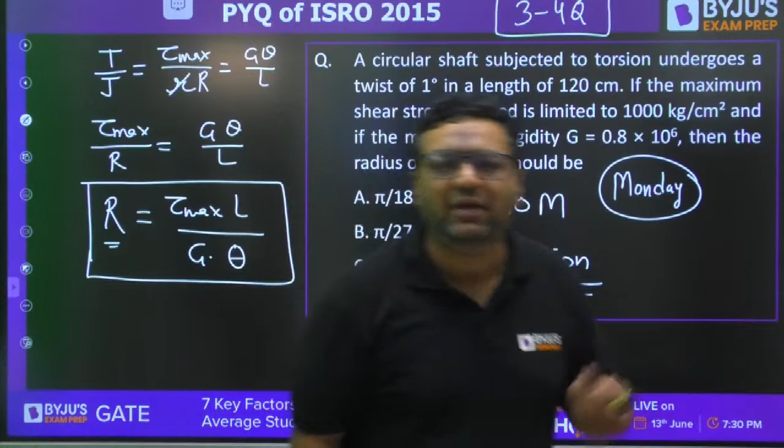Hardly 3 to 4 questions in the paper are time-taking, so in the real exam attempt those last since time is limited. GPA, please solve these questions. When you see all types of questions today, you'll get an idea of the different things they ask in the paper. Previous years' papers help because many times questions repeat in ISRO too. Today I'll show you 4 repeated questions which we've already discussed in the ISRO PYQs.

Ruto has given the right answer, 27 by pi is correct. First you need to convert theta. Theta is given as 1 degree, you can write it as pi by 180, and this becomes radian. Whenever you put the theta value into sine, cos, or tangent, you need to put it in radians only. So when you put this value, the answer comes out to be 27 by pi. So D is the right answer.

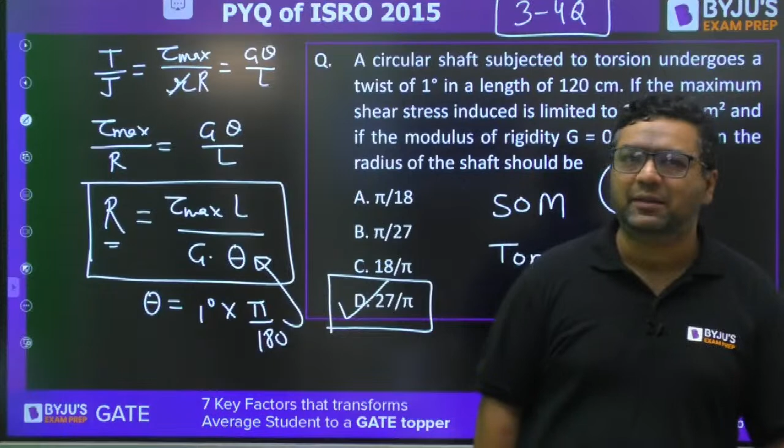Vinod, I feel you have made some mistake here, the answer is D. I have already solved it for you, let me cross-check once again. I had already done it before starting so I can tell you the right answers. Yes, the answer is D, no doubt D is the right answer. I've also matched it with the official answer key, answer is D for this. Is it clear? Shall we move on, guys?

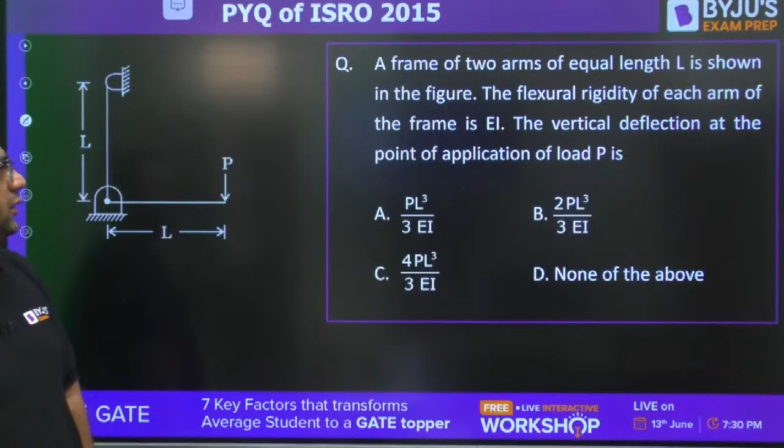Shall we move on, guys, to the next question? It's once again from strength of materials, related to deflection, and it's a very easy question. In fact, it's a repeated question from GATE, asked in GATE mechanical, civil, XE, all the branches.

In this question, they say a frame of 2 arms of equal length is shown in the figure. The flexural rigidity of each arm of the frame is EI. The vertical deflection at the point of application of the load is what we need to find, deflection at A. If this is A, this is B, and this is C, to find the deflection at A, you just need to partially differentiate the total strain energy with respect to P. That gives you the deflection at point A, in the direction of load. This is what you need to do.

Very good, Jamin, Roshan. Are you giving the answer for this question or the previous one? When you do this, U is nothing but the strain energy of AB plus BC. Great, Jamin. So if you see the AB part, you are going to have this shear force.

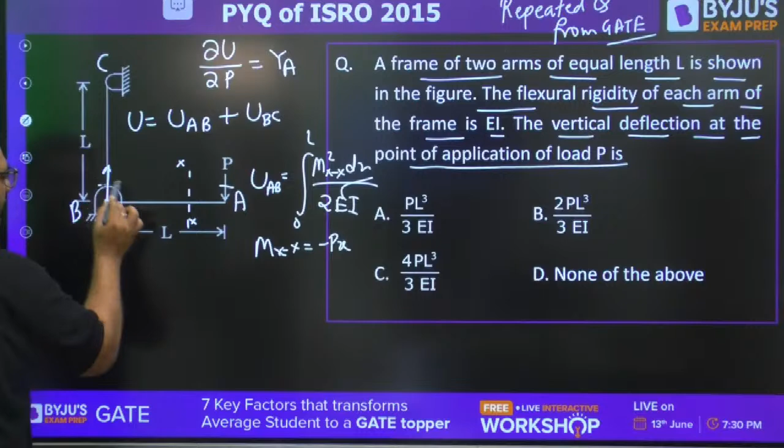When you take the section XX, you can write U of AB equals the integration from 0 to L of mxx squared dx upon 2EI, where mxx is nothing but minus px. Similarly, for BC, you make one force here, another force there, and this makes a couple. So for this beam we have a bending moment and axial force, and we find energy only due to moments. So U of BC comes out to be once again mxx squared dx upon 2EI, integration from 0 to L.

So when you add their U together... and Pagel word, yes Pagel word, you're slightly late today. So the answer for this, everybody is saying C. They are asking for the deflection, and yes, everybody has got C.

There are some questions which are coming as it is. Okay, fine guys. Shall we move further? Are we ready?

So for this question, are we getting B or C? Please tell me, look at it carefully and then answer. B or C? When you will be finding out the strain energy of this, what will you be getting?

Px squared, so you will be having P square L cube upon 6EI. That's the energy you get. And when you will be solving this, you know this is going to be the case, and you put the value as it is, P into L, so we will be having P square L cube upon 2EI. So when you add these two, P square L cube, you can write 3 here, 3 into 3, so 3 plus 1 is 4. It will be 4 P square L cube upon 6EI.

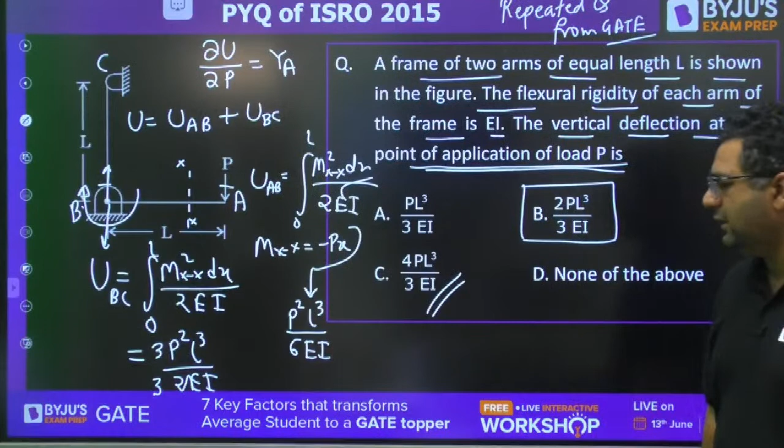Moving to the next question from thin cylinders, once again strength of materials. This is asking: a thin cylindrical shell of diameter D, length L and thickness T is subjected to an internal pressure. The ratio of the longitudinal strain to the hoop strain. So you know we are having longitudinal by hoop. Okay, longitudinal is PD by 4TE.

What will you be getting, 2 minus mu or 1 minus 2 mu? Is it correct or have I written it opposite? Okay, Roshan has given the answer to be B, Pajalward has given the answer to be B. Have I written it correct or wrong?

Is it correct? When you are going to find out the circumferential strain, you write sigma C by E minus mu times sigma longitudinal by E. So we are going to have sigma, this will be, I feel, sigma C is PD by 2TE minus mu times PD by 4TE. So when you have this, PD by 4TE, it is going to be 2 minus mu.

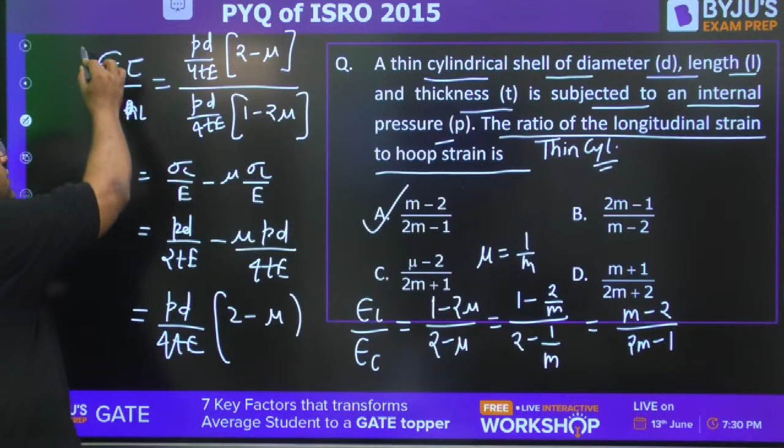Are you getting it? This is the ratio of circumferential to longitudinal, but we need to answer longitudinal to circumferential. And you know Poisson's ratio is mu, so you can write mu equals 1 upon m.

Did you get your mistake or not, please tell me that. Everybody, yes, so the answer for this is going to be A, not B. Is it clear for everyone?

Shall we move on, guys? Don't worry dear, here we are only to correct ourselves. We can make mistakes here, but we need not make mistakes in the exam. Is it clear for everyone?

Now this question is also a repeated question, already asked in GATE and ESE both. This is a repeated question of both GATE and ESE. Yes, only one change they have done: they have increased the length to 2L. In the original question, length was L.

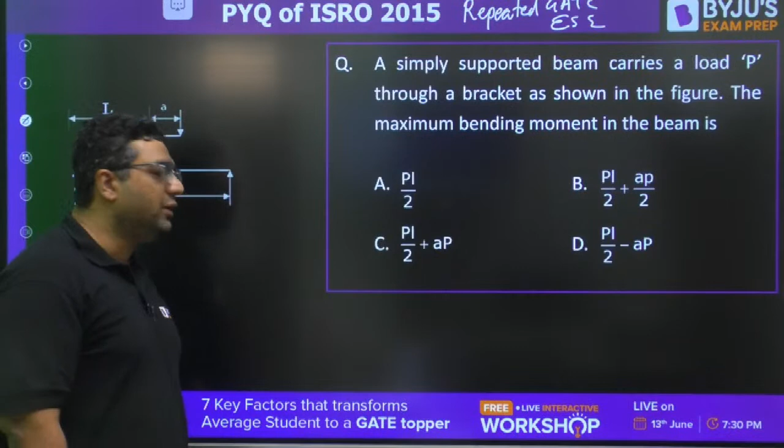So do not copy and paste this time, Jamin. Jamin, did you get the mistake or not, please tell me that, regarding the previous question. Please answer guys, how will I get to know if you are getting it or not? Very good, so this is the case: we are going to have a simply supported beam, with supports A and B.

So here the reaction RA will be coming, here the reaction RB will be coming. We also have the force here. First, we will shift the effect of the force onto the beam. We apply one force downward, one upward. This and this will make a couple like this. So now we have a simply supported beam like this. This is RA support reaction, this is RB support reaction. At the center we have a force P, and then we have a moment P into A.

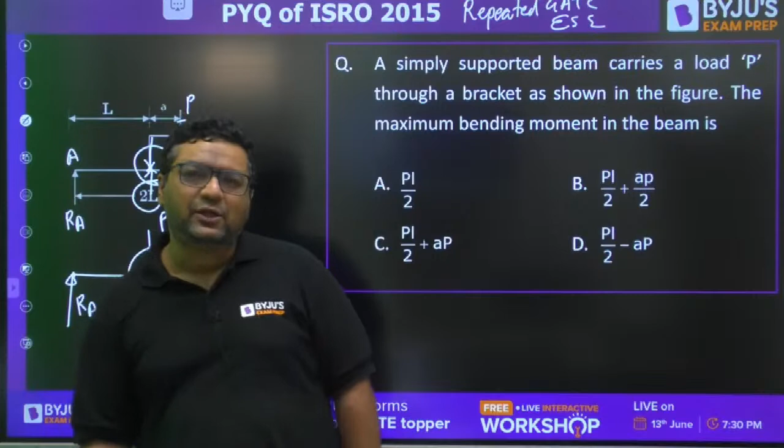You need to tell the maximum bending moment. Why is it in terms of M, why not in terms of Poisson ratio? Actually, Poisson ratio is also defined as 1 upon M. Whenever someone defines something, he defines it in his own way. There were researchers living in countries where the FPS system was used, some used the MKS system, some used the SI system. So based on their system, they define things accordingly. Their notations are like in material science where you study alpha, beta, gamma - these are Greek words. So it depends on who gave the definition. Poisson ratio is always defined by either mu or 1 upon M.

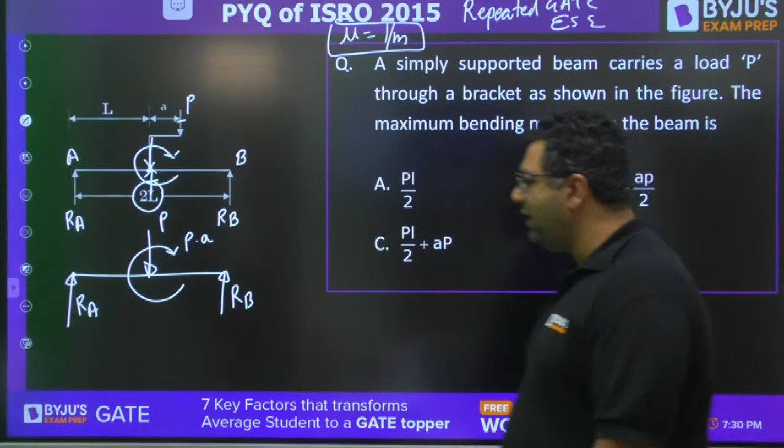So the answer for this is okay - answer given by Pagel and Roshan is B. We will check that. First we will find out RA and RB. RA will come out - total length is 2L, mind it, total length is 2L. You will have P by 2, then minus PA by 2L. This is RA. What is RB? P by 2 plus PA by 2L.

When you go for the bending moment diagram of this, it is very easy, we have seen this many times. It will go like this, then there is a jump due to this, and then it is like this. So this value will be the maximum bending moment. If you want to find this value, you can do RA into L - that will give this value - plus you need to add PA. So maximum bending moment will be RA into L plus AP.

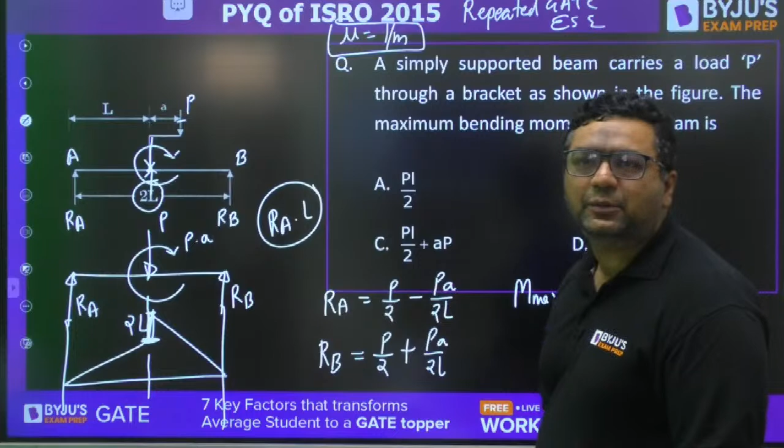So RA is P by 2 minus PA by 2L into L plus AP. When you solve this, you get PL by 2 minus PA by 2 plus PA. So it is PL by 2 plus PA by 2. Is it clear? Yes. So are we getting the answer?

What is the answer for this one? Is it C? This is PA by 2L, multiply with 1 by 2. Where do I need to multiply with 1 by 2? Dear, this is the load P, divided equally into 2 - P by 2, P by 2. Then this is P into A, so PA by 2L will be subtracted here, added here.

Why? Because the direction of this is going to be like this, same as that of RA. So here it will be subtracting, here it will be addition. Then I have multiplied it with L, because this half length is going to be L. So when you multiply with L, you get PL by 2 minus PA by 2L, and you get PL by 2 minus PA by 2 because L and L get cancelled out. Then you have plus AP. So the answer is going to be B.

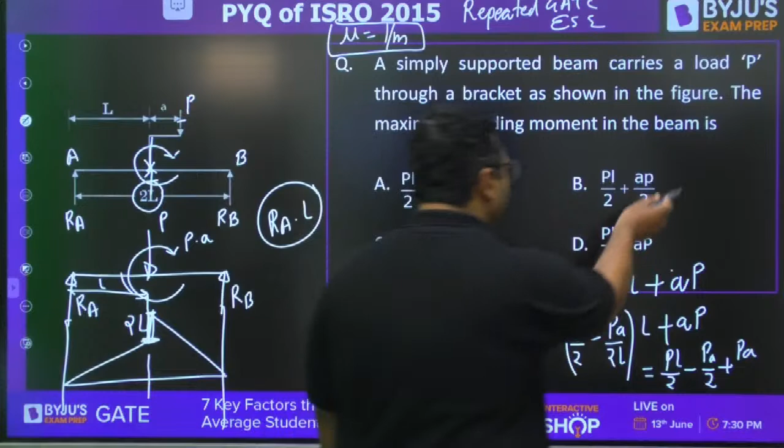Jamin says what you said I didn't get, but the multiply with 1 by 2 I didn't get. I feel the answer will be B for this - PL by 2 plus AP by 2. Is it clear for everyone? Please tell me. Okay, very good.

Moving to the next question, guys. Now we are coming up with the column chapter. This question is from column. This time I will not help you, I need the answer from your end. It is an easy question. Very good Karan, very good Roshan, very good Pagel word. So, answer for this question.

A vertical column has two moments of inertia, Ixx, Iyy. The column will tend to buckle in the direction of: option A, axial load; option B, perpendicular to the axis of load; option C, maximum moment of inertia; option D, minimum moment of inertia. Very good Arunita, Pejal Word, Shahid.

Naruto, Vinod, Jamin - the answer is D, because you define Euler's buckling load as pi square EI minimum upon LE square. So my dear, buckling will always happen for minimum I, because where I is minimum, buckling will happen since the load will be lesser there. So D is the right answer.

So guys, next is machine design theory of failure. Machine design theory of failure. Tell me this answer, this is question number 7 going on.

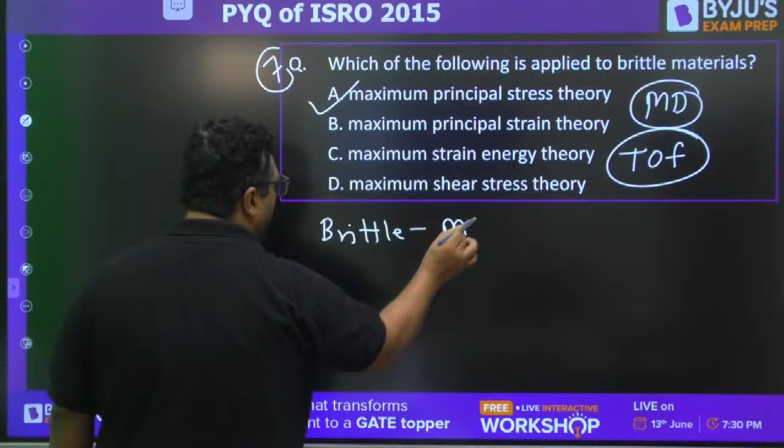Very good. MPST. Here I am telling you, if they say material is brittle, you need to decide without any thinking - you will say MPST. When they say ductile, then you know there are two options. If nothing is mentioned, MSST. If they say ductile material and we need the economical theory, then economical is MDET. But that is a rare combination, never been asked. So either this or this has been asked.

Moving further, wonderful guys. This is once again a repeated question of gate mechanical. That's why I said when you are going for mechanical engineering questions for gate, or questions of ESE, many questions will be repeated. I feel everybody got this question. This is a repeated and very famous question.

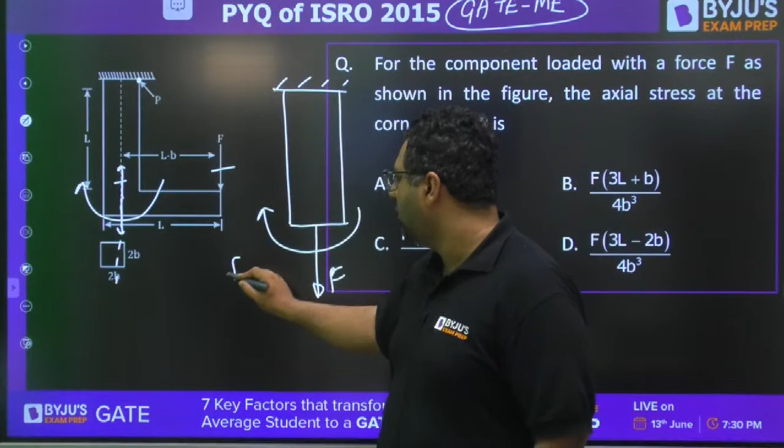So this is from bending. They have applied a load F here and they are asking the stress at this point P. For that I need to shift this load onto the longitudinal axis of this member. So we will be applying one force downward, other force upward. This and this will be creating a moment like this. So finally we are having a member now like this, and we have two things: one is M, other is F actually. F into L minus B - this is the moment. And you need to find out the stress at this point. Okay, this is the question.

I feel here also many students have remembered. Yes, try to solve it guys, because in paper they will change something and you will be thinking what happened. First of all, it is a square geometry of 2B side. So you know that at this point P, this load will give us tensile stress only like this, and for bending you can see it is like this.

So we just need to add these two values. So if you want to write down the stress at point P, you will write force by area plus M upon Z of NA. You know force is F, area is 2B whole square. Then bending moment is F into L minus B - very good, Jamin, F into L minus B. And Z is A cube by 6, so 2B cube by 6.

When you will be solving this, answer will be coming out to be D. Here you have F by 4B square plus F into L minus B divided by 2 cube is 8 - it is 6, 8 B cube, so it is 4, it is 3. Okay, so we can write in the denominator 4B cube. You would be having here F into B plus F into 3L minus 3B.

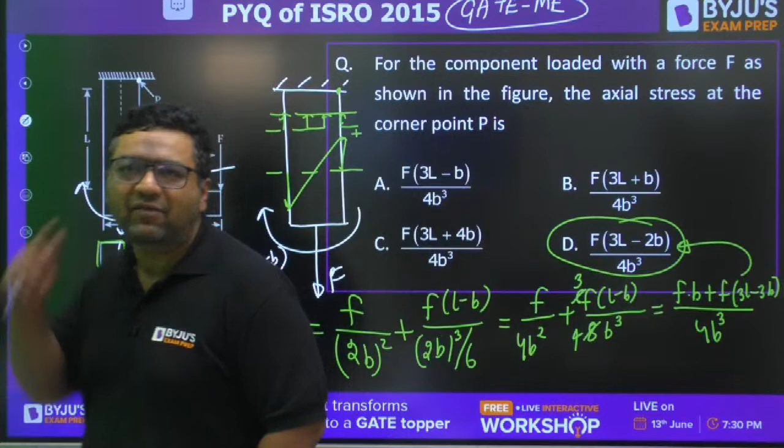So solving you will get option D. Jamin has given the right answer for this question, Shahid also, Naruto also, but I feel Vinod and Pejal have made the mistake. Got it? Got it, Pejal and Vinod? Please tell me that.

Wonderful guys, moving to the next question. Next is once again from SFD BMD - actually it is from SFD BMD plus bending, because they are asking you the bending stresses, the maximum magnitude of bending stress. We know that when we are talking about maximum bending, it will be M upon Z of NA. So when it is maximum, M should be maximum. So using SFD BMD, you need to find out the maximum bending moment. If you get the maximum bending moment for this, you will get the answer.

And for that you need to write the bending moment equation. For that you need to find out support reaction - first find out RA and RC. Then after finding this out, you can go for the shear force equation, bending moment equation, where shear force becomes zero, bending moment will be maximum. So that is how you need to go about it. If you are going with equations, or with the BMD diagram, you must be aware that from the BC region, you would be having a parabola. I will be showing you the diagram as well, but first you find out the value of RA and RB - this is the first task.

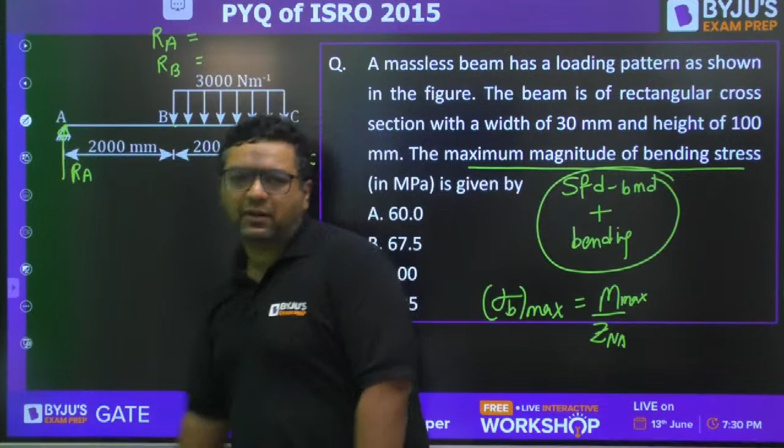So you can see in this paper, some questions are lengthy, like the 2020 paper. So in some of the questions you will find something like that, but otherwise all questions are theoretical. Yes, solve it guys.

Solve it, guys. Solve it, solve it, solve it.

After me, Suraj sir and Chandra sir will come for thermal, heat transfer, fluid mechanics, RAC, IC engine, power plant, industrial engineering, engineering mechanics, theory of machines. All questions would be covered.

In this paper, major weightage was for SOM, MD, and production. For these three topics, I have more than 35 questions. So that is how you can relate. In some papers the weightage is different, in others it is different.

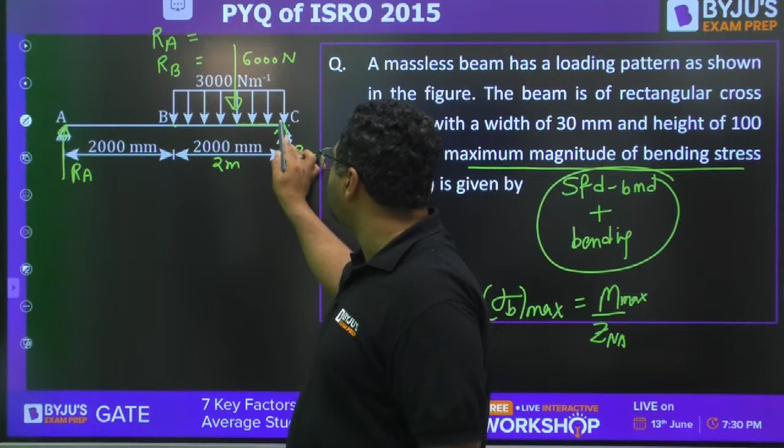So you can see this is 3000 Newton per meter applicable for 2 meters, and you can assume that to be present at the centroid. So at centroid, you can assume 6000 Newton, at 1 meter distance from here and 3 meter distance from here. From that only we will get the values. This will be 4500, this will be 1500. So values will be coming like that, and we got them very easily.

Now if you want to write the shear force equation, I am taking the section here at a distance of x. You can write it as per the sign convention: to the left upward, right downward is positive; left downward, right upward is negative. So right upward is negative.

So I will write minus RC plus W into X. It will be minus 4500 plus load 3000 into X. From here you get X equals 1.5 meters. It means the maximum bending moment will be coming somewhere here, at 1.5 meters.

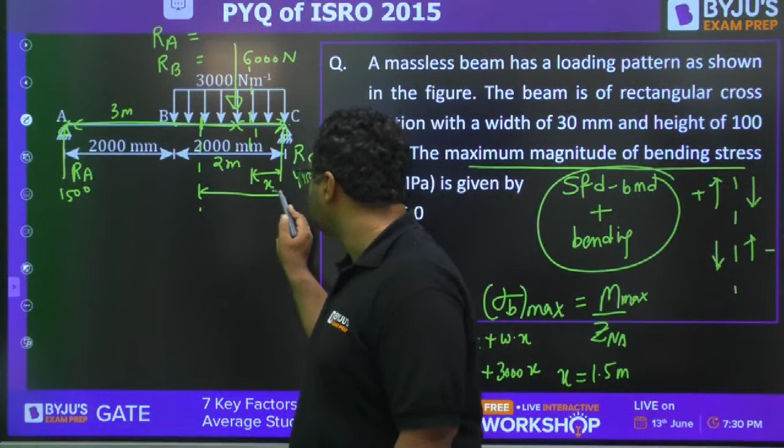Now my dear, if you want to know - very good, very good. Jamin have given the answer, Pejal would have given the answer, and the answer is correct as well.

So when we are talking about the maximum bending moment equation, you know the sign convention - this is sagging, this is hogging. This is creating sagging, so we will write RC into 1.5 sagging, minus W into 1.5 into 1.5 by 2. So RC value is 4500. 4500 into 1.5, minus 3000 into 1.5 squared by 2. Here you get the maximum value of bending moment.

So once you get this, you need to put it there, and they have already mentioned the width to be B, height to be 100. So Z will be BD square by 6. After solving, the answer comes out to be 67.5.

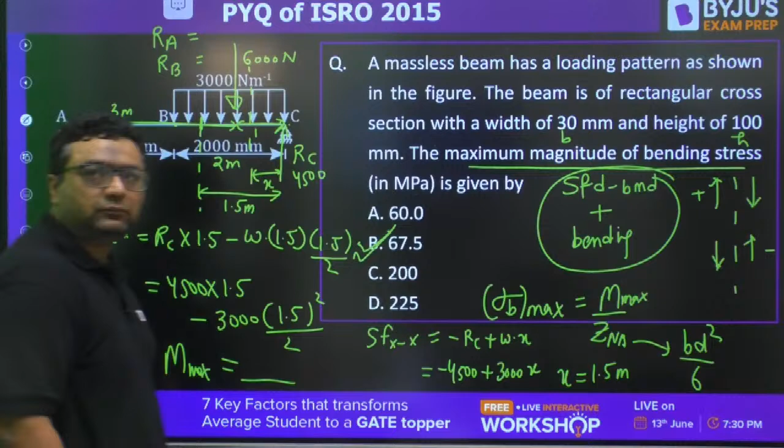Everybody understood? Please tell me that. This type of question you can have in GATE as well. So Jamin and Pejal have solved it. Vinod, you got it. Shahid, you got it. Naruto, you got it. Please tell me that. Everybody, please tell me that. Then only I will move further. This was question number 9 for us.

Yes, Shahid, this is very - that's why I said in ISRO paper you need to attempt these questions last, because if you solve these questions in the starting, you may not be able to complete the paper and you may leave some easy questions.

So that's why I always say when you are giving ISRO, in the first reading, you tick only those questions which you already know by looking at the question. The second attempt should be for questions using less calculation but which you know how to do. The third attempt should be for this type of question - third attempt meaning the third time you read the paper. So this is PL cube by 3EI, the deflection under the load P for a cantilever beam.

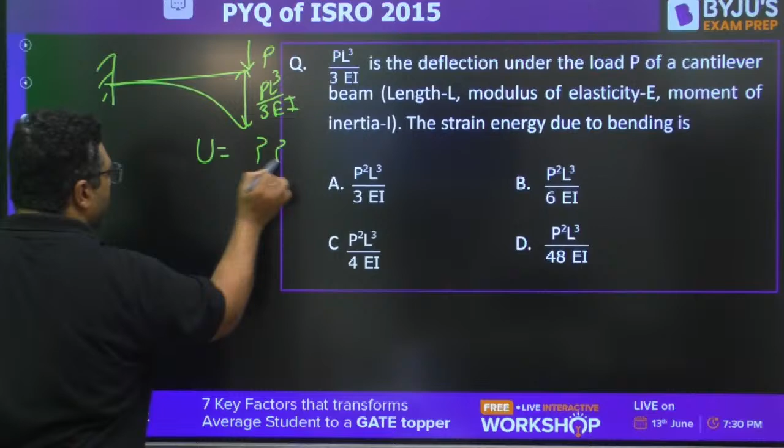The strain energy due to bending is - he is saying that if we have a load P like this, because of this you know the deflection is PL cube upon 3EI. Then what is strain energy? I already told you strain energy is half into force into deflection. You already know half, you already know P, you already know deflection. Just apply the formula and get the answer.

What would be the right answer? Wonderful, everyone have already given the right answer B - P square L cube upon 6EI.

Moving further, now material science questions came into picture. There is one good thing about ISRO - they put questions in continuity, like all SOM questions are kept together. Now you are having the material science questions, and material science weightage is equal to the weightage of production.

Sir, as per notification, single mark questions will be there. Dear, it doesn't matter about single marks, it matters about the time. Previously they were giving us 80 questions with a time of 90 minutes. Now you are getting 95 questions and a time of 120 minutes.

By looking at that, understand - don't go by weightage. Previously they were multiplying it with 3, now they are multiplying it with 1 only. That's the difference - they're just trying to make it complete 100, nothing more. But they will give you questions as per the time, not as per the marks. Are you getting it?

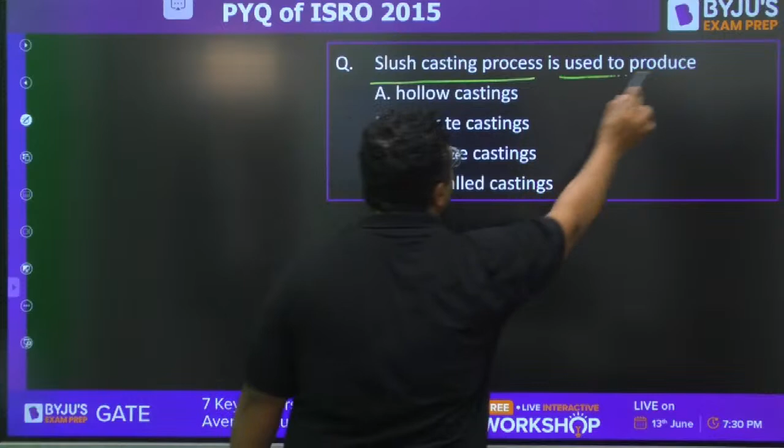Moving to the next: slush casting process is used to produce hollow casting, intricate, large size, or thin walled castings. Karan is saying B, Pejal said A, Neeraj C, Jamin A. The answer is A.

Whenever we are talking about slush casting, what do you do? You make a cavity like this. In this cavity, molten metal is kept, then it is allowed for partial solidification. When desired thickness is obtained - not necessarily thin thickness, just desired thickness - the rest of the molten metal is taken out. So whatever you got, that casting is hollow. It may be thin or thick, but it will be hollow. So the answer could be either D or A, but the right answer is A because it can be of thick wall also. So in this, what we are doing is partial solidification. Very good, Vinod.

Moving to the next question, guys. This is once again a question of gate type, from casting, on riser design, using Chvorinov's law. Solidification time is directly proportional to V by SA, whole squared. So you need to find out the solidification time ratio for sphere to cube.

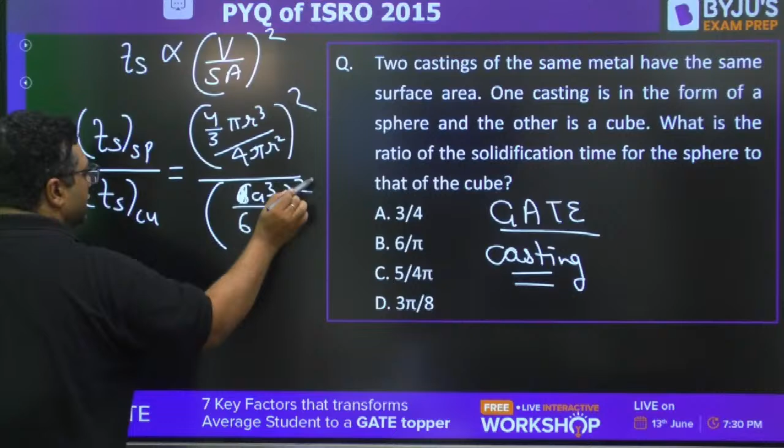Sphere to cube: we can write volume of sphere as 4 by 3 pi r cube, surface area as 4 pi r square. For cube it is a cube by 6a square. You need to find out this ratio with the given conditions. The hint is in front of you.

Calculate it, guys. This type of question you will be attempting in the last because they need more calculations. Solve it. From my side, this is question number 19.

Jamin is saying B, and B is the right answer. Very good, Jamin. What about you, Vinod and Pejal? Shahid, Karan, are you doing or not? Yes, everybody. Pejal, the answer is B. It is very calculative - 6 by pi is the correct answer.

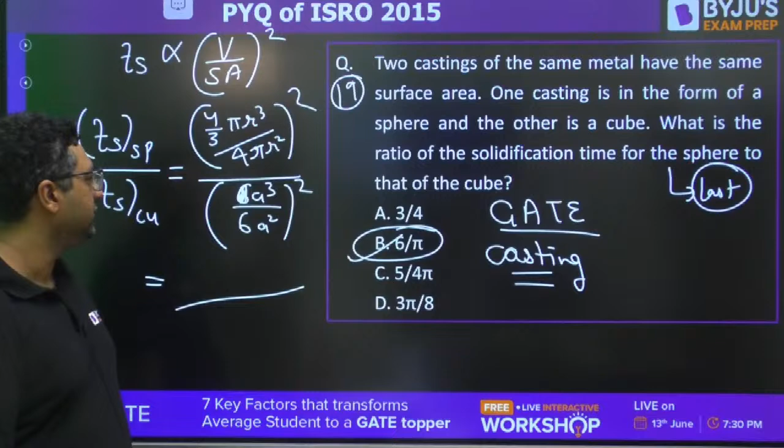Moving further, guys, you'll see this 4 will get cancelled out, pi will get cancelled out. This is 4 pi r square, this is 4 by 3 pi r cube. So when you solve, the answer will be coming like this. They have the same surface area - already given the same surface area - so you can directly cancel out these two things, and you will be getting the answer to be 6 by pi.

Metrology and inspection.

We are using plug gauges for: taper bores, cylindrical bores, spherical holes, or none of the above. You must be aware that plug gauges are used for holes, and ring gauges are used for shafts.

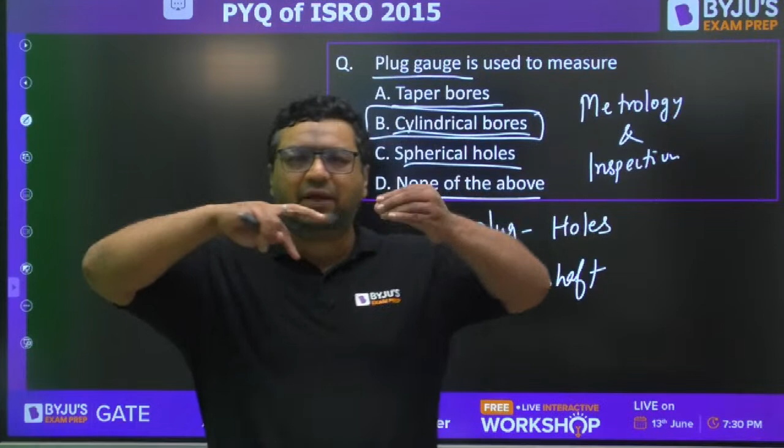There's confusion between A and C, but both are wrong, Fejal. The answer is B for this. When you have ring or plug gauges, ring is like this - this is a ring, so ring is used for cylindrical. We always study only for cylindrical bores, meaning cylindrical holes only. So C - we have never studied about spherical. You must be confusing between A and B, but taper we do not study, so we go for cylindrical bores.

This is question number 21.

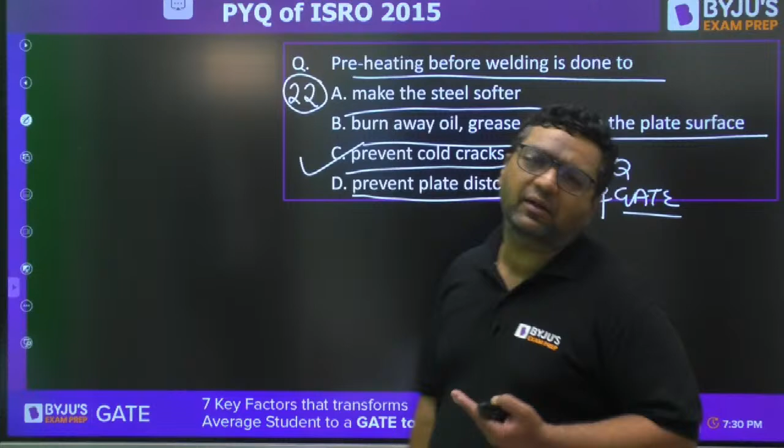When we go with preheating, this is our target, because the cooling rate of the nearby area will reduce. Because of that we will not have cold cracks, so when we are not having cold cracks, this is the purpose. But we also get these other advantages, because whenever we go for preheating, oil, grease, and those layers are also burnt out. So this is also correct, but the purpose is preventing cold cracks - these are extra benefits we are getting.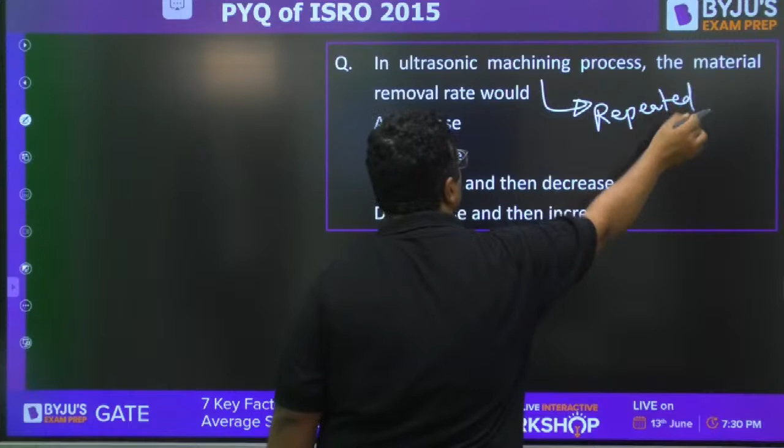This is a repeated question on ultrasonic machining. The material removal rate would increase, decrease, increase then decrease, or decrease then increase - what would be the answer? This is question number 25.

Vinod is saying C, Jamin and Naruto saying A. This time Vinod is correct. First it increases, then decreases. So when we are talking about ultrasonic machining, the material removal rate first increases, then decreases.

Why? Because when we go for ultrasonic machining, we produce vibrations. We are applying abrasive particles which act like cutting edges. So when the tool moves inside for machining, other cutting edges will also apply mutual drag between them, so they are less induced in cutting. That is why initially MRR is more, then we get less MRR. The reason is the mutual drag present between the cutting edges. Got it everyone? I've given the explanation as well.

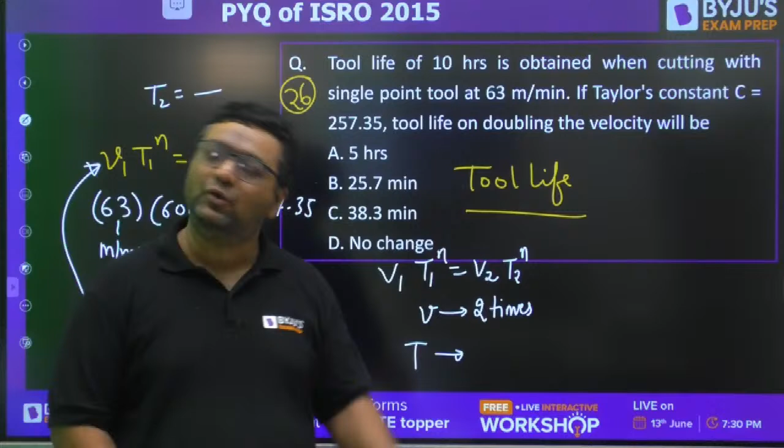No one can solve these type of questions without a calculator, since you need logarithm here. Without a calculator, you cannot solve it - you need at least a log table, otherwise it's not possible.

Moving to question number 27. This question is from the 3-2-1 method, jigs and fixtures. This type of question was also asked in GATE 23, in a more difficult format - based on the 3-2-1 method, the 3-2-1 principle.

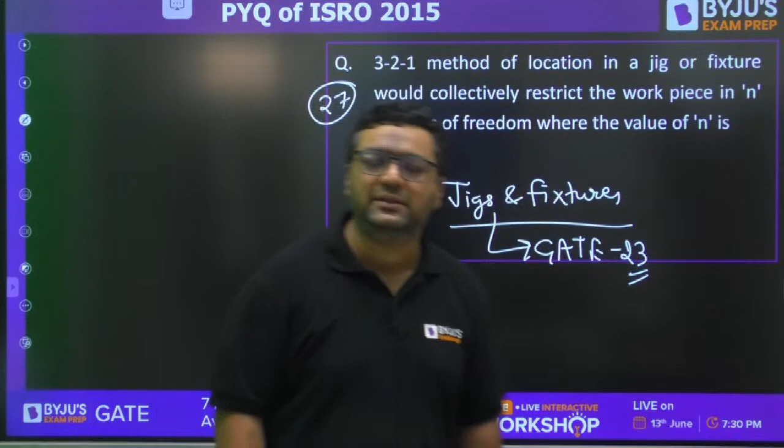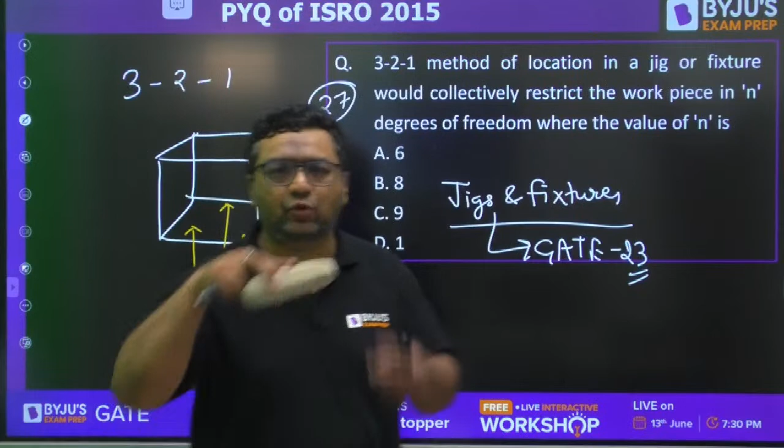Jamin is saying 9, Vinod is saying 6. Whenever we are using the 3-2-1 method, we are having a body like this. We provide 3 pins here - 1st pin here, 2nd pin here, and 3rd pin here. So assume this to be the body, and I am applying one pin here, another pin here, and a third pin here.

By providing these 3 pins, I am restricting this rotation - it cannot go in the negative x direction. Similarly, we apply 1 pin here, another pin here, which stops this 3rd rotation and also restricts this translation. We apply 1 more pin here as well. So these 3 pins restrict rotation clockwise, anticlockwise, and also restrict translation - 5 degrees of freedom are restricted by these 3 pins.

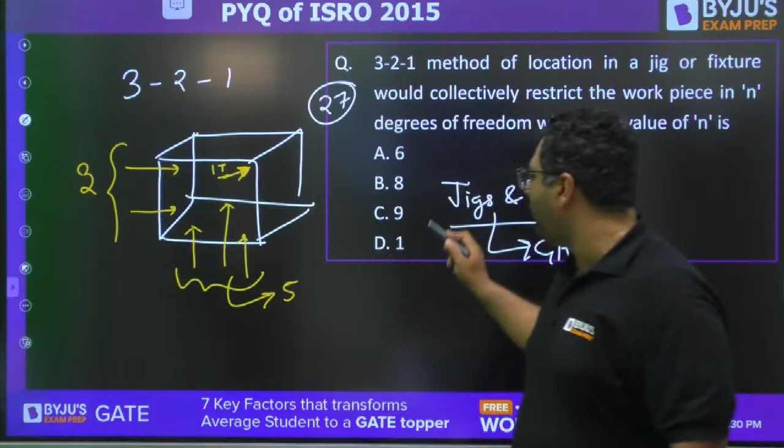Similarly, when applying these 2 pins, you restrict rotation in this and this direction, because one pin is here and the other is here - it will not allow it to rotate like this. So 2 rotations and 1 translation, meaning 3 degrees of freedom are restricted by this. 5 plus 3 equals 8. When you apply this last pin, it stops motion in the Z direction - only 1 translation. So total 9 degrees of freedom are restricted by 3 plus 2 plus 1 pins.

So the answer is 9 for this, guys. Please tell me, did everybody get it or not? Neeraj? Very good. Karan, Vinod, got it or not?

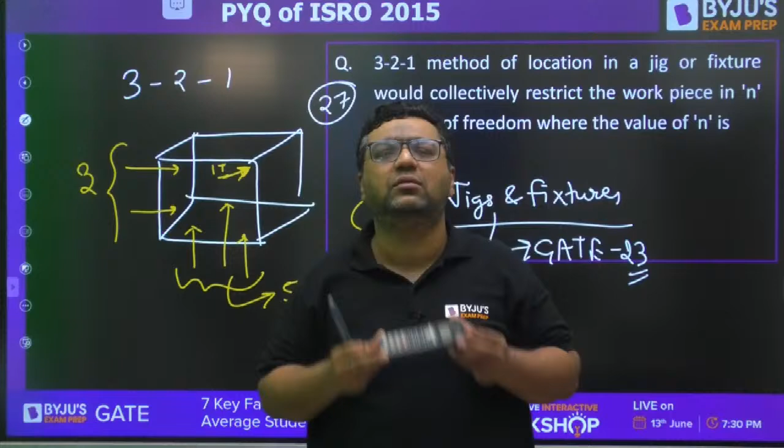Still have doubt? Just feel it. This is the body - if you have one pin here and another pin here, it will not allow this to rotate, clockwise and anticlockwise. Total degrees of freedom are 12 - 6 translation, 6 rotation. One rotation clockwise about the x-axis, other anticlockwise about the x-axis - so these 2 are restricted, these 2 are restricted, meaning 4 rotations and 1 translation, so 5 are restricted. When we talk about this and this, it will not allow this rotation and this translation. So total, my dear, 9 degrees of freedom are restricted by these 6 pins.

Okay, so 6 pins, 9 degrees of freedom.

Moving to the next question, related to metal cutting. Question number 28, it is a slightly lengthy question.

They have given the rake angle alpha as 5 degrees, the undeformed chip thickness (uncut chip thickness) as 0.25, the width of cut, the shear strength as 350, and the coefficient of friction. You need to find out FC and FT.

FC and FT - I feel you would be aware of the shear force. First you need to find out shear force, and from that you can find out FC and FT. Everybody should remember the formulas for this. Try this and get it. This is question number 28.

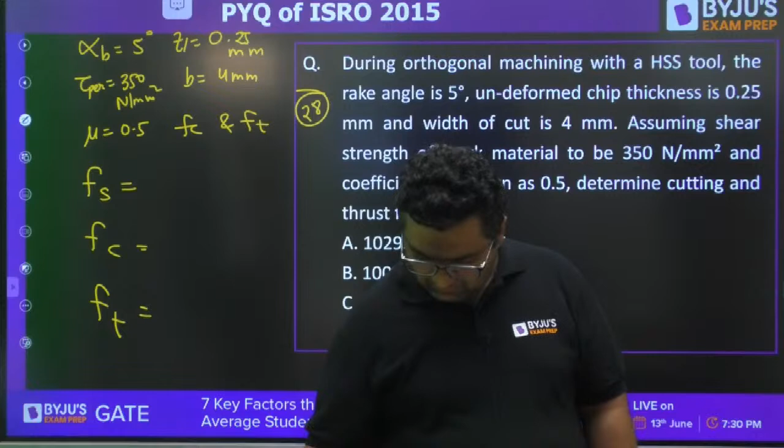After that we are left with 7 more questions from my side. Only this was the last numerical from my side; all other 7 questions are theoretical. Try to solve it.

If you want a hint: shear force, shear stress, phi is the shear angle. You can apply this formula and it will give you the shear force.

After getting the shear force, you can find out the cutting force, and that is nothing but Fs cos of beta plus alpha minus... okay, one second.

First tell me this, then we will move further.

Width of chip is given to us, T1 is given to us. Fs cos(beta minus alpha) divided by cos(phi plus beta minus alpha).

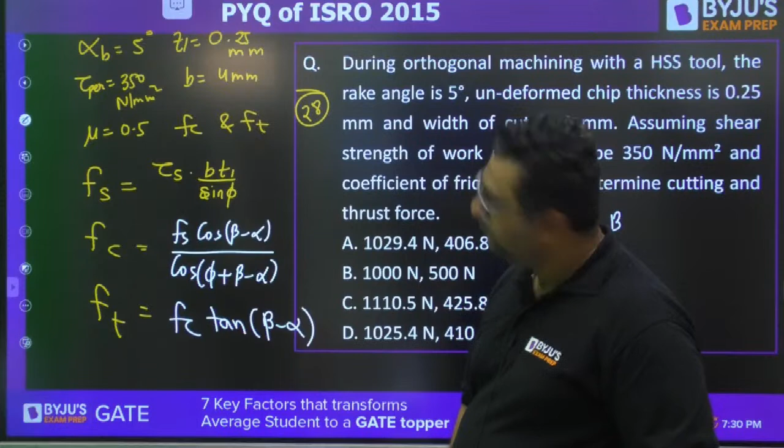Angles are given: rake angle, T1, B, shear stress, beta. Find out the answer.

The answer is A. Dear, you are correct. Jamin, you are correct. But this is going to be the case with everybody now.

Because this year, UPSC civil services paper was very difficult - they asked much beyond the syllabus. So this is for everyone, that's why exams are relative. That's why some have petitioned to reduce the cutoff of CSAT from 33 to 23%, because they have kept the minimum cutoff as well. For ISRO, there is no minimum cutoff.

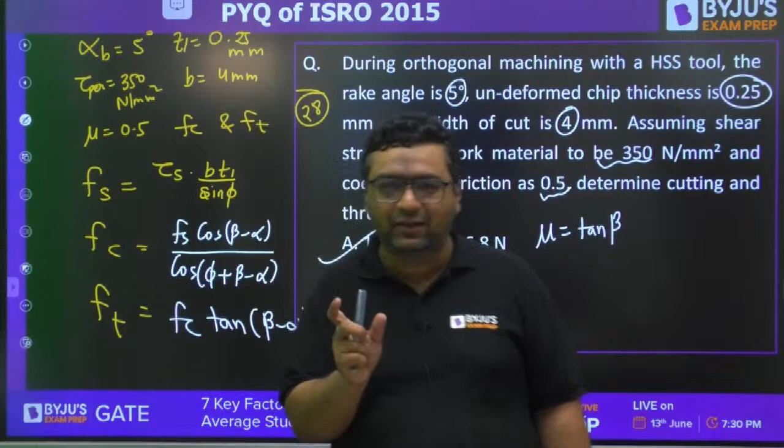So these type of questions you should try at the end only, because this problem will definitely happen. But these type of questions you will find in only 3 to 4 papers out of more than 15 years of previous papers. It happens sometimes, and when it does, the cutoff is very low. So no need to worry.

Answer is A, so Jamin, answer is A. I feel somebody else also gave this answer - A is the right answer. So FC will come out to be 1029.4 Newton and FT will come out to be 406.8 Newton. A is correct.

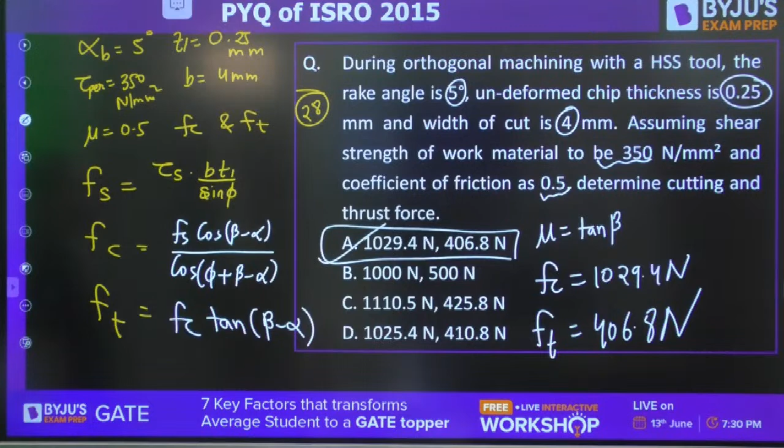Fine, very good, guys. So we have completed 28 questions. Now are you ready for the easy questions?

Now we are having continuously easy questions. By just looking into that, you need to answer.

Once again, metrology. This figure shows the principle of traceability, interchangeability, matched fits, or selective assembly. You can see this is hole tolerance, this is tolerance of shaft, given like this.

So my dear, what would be the answer? Very good - the answer for this is selective assembly, because you can see the tolerances are in different ranges. If the tolerance of hole and tolerance of shaft are the same, then we call it interchangeability. So here the answer is going to be D.

Very good, question number 30. Moving to question number 31. A basic hole is one which has lower deviation 0, upper deviation 0, both lower and upper deviation 0, or none of the above. Basic hole is this one, H type.

What will be the answer? Yes, A will be the answer - lower deviation is going to be 0. This is lower deviation, this is upper deviation.

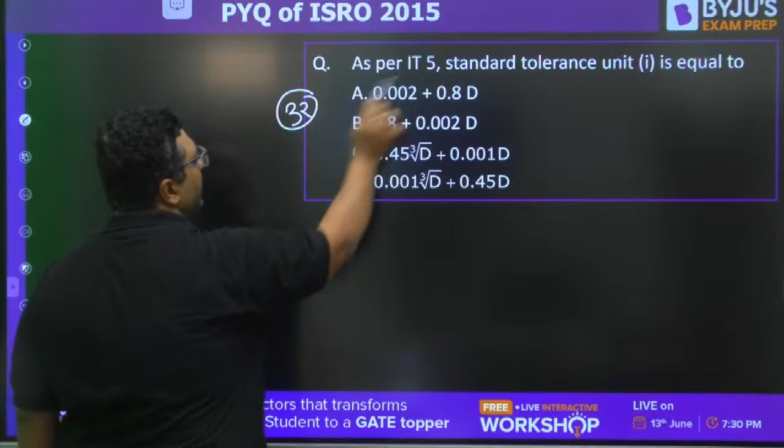Okay, moving to next question number 32. Generally in GATE, they are not asking this - the meaning of IT5. The meaning of IT5 is this or this. I feel this is the value of I, everybody would know that.

What would be the answer? This is the value of I, but IT5 indicates what? Actually, whatever you are talking about, these terms are starting from IT6. After IT6 onwards, we are having the use of I. So the answer for this, question number 32, what will it be?

It is B. 0.8 plus 0.002. Very good.

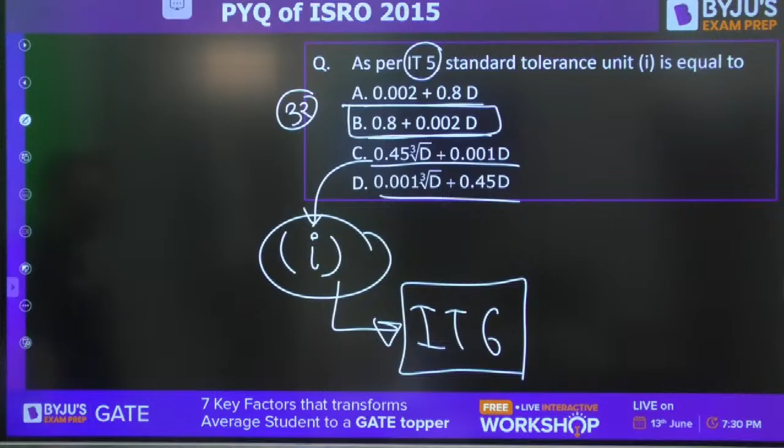B or A? Please check it. It is not B, it is A. 0.002 plus 0.8D. A is the right answer. Okay, A is the right answer.

Pejal, A is the right answer. By C, who is saying C? C is the value of I, the fundamental tolerance unit. That has nothing related to IT5. That will be related to the number present from IT6 to IT16. Is it clear for everyone? Please tell.

Moving to this question from machine design. Trapezoidal threads. Acme, square, buttress. The answer is Acme. Very good, Vinod. Shall we move on further?

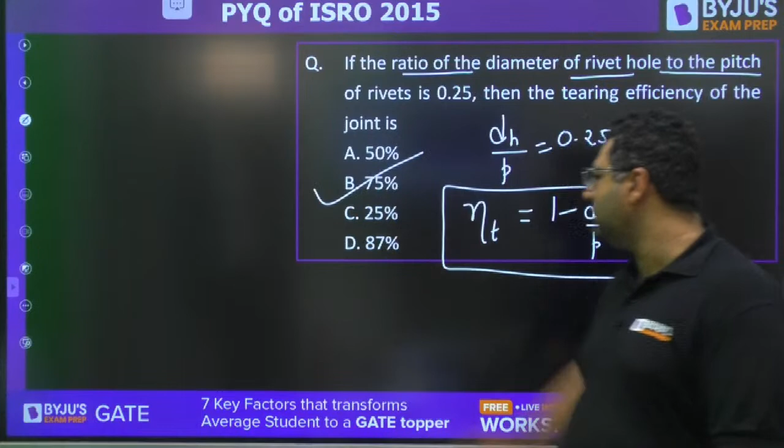Moving to next question, once again machine design bearings. This is a repeated question. Life of bearing: the life of a ball bearing for 10 kilonewton load is 8,000 hours. This is a repeated question, I have done it in the paper of 2018 or 19. If the load is increased to 20, keeping all other conditions same, life will be?

Yes, you need to tell. L2.

Tell me guys. Now after me, Suraj sir would be joining for his subject - mechanics, theory of machines, HMT and industrial engineering.

Yes, Jamin, Naruto, Vinod, everyone, answer will be 1000 hours because you will write 10 kilonewton into the life is 8,000 hours equals 20 L2. As it is the life of ball bearing, it will be 1 by 3. So we will be making the cubes, 0, 0 cancel out. So 8,000, 8. So L2 will be 1,000.

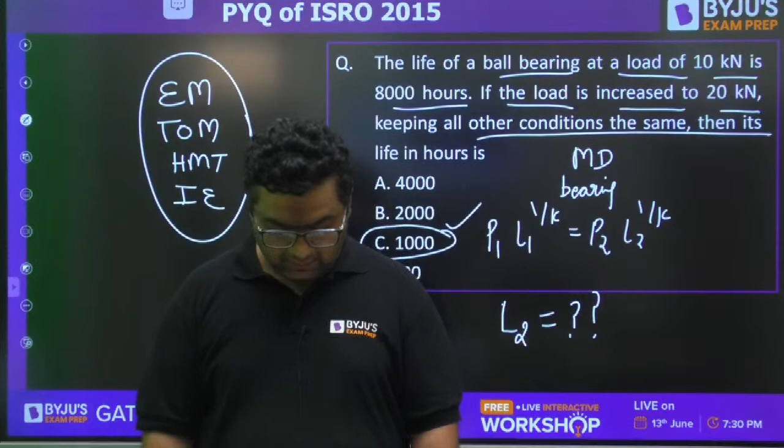So guys, from here I am leaving. Okay, one last question for me, 35th from welding. After this question, Suraj sir will come for other subjects, then after Suraj sir, Chandrasekhar sir will come. So tell me the answer: which one of the following is a solid state welding? Gas tungsten arc welding, resistance spot welding, friction welding, or submerged arc welding?

Yes, there will be a change in the type of question then. In this paper, mechanics questions were also lengthy. Okay, so you will see when Suraj sir will be coming. So guys, for you we are sitting and solving the complete paper one night before, and you are not that much enthusiastic, not coming for revising the paper.

What would be the answer here? Friction welding. So my dear, gas tungsten arc welding is arc welding, this is resistance welding, this is arc welding. So only this is the solid state welding. Okay, from here I am leaving.

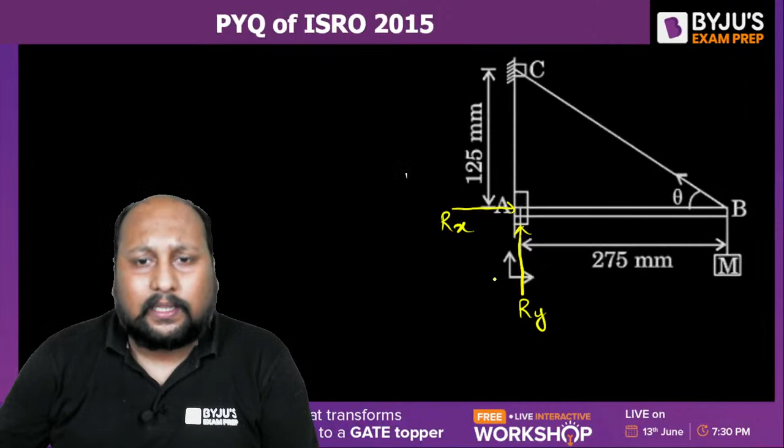I think the diagram is pretty much clear now. Let's say this is your Ry and this is Rx. If I want to calculate these two reactions without considering the reactions at point C, the first method is to take the moment about point C. They've already mentioned that this bar is weightless, it has no weight. So the moment about point C equals 0: Rx into 125 is equal to Mg into 275. So Rx equals 35 into 9.81 into 275 divided by 125.

Can you tell me what rough estimate value we are getting?

If you want to go for an easy calculation, you can take G equal to 10, and you can near about get, you can eliminate two options in this case. Either it will be in the 700 range or it will be in the 343 range. If you see clearly, it will be near about 700 range. So I can simply say this is 755 Newton, taking a round off. If you take G as 10, the calculation will be easier and you'll get somewhere in the 700 range. So I can say A and B are not possible.

Now I need to calculate what is the reaction at point A in the Y direction. Can you tell me, for calculating the reaction in the Y direction, how will we be proceeding? What will be, how can we calculate this?

Now we'll be saying, sir, let us take moment about any other point. But if you take moment at any other point, then the reaction at point C will also be included, right? So what we can do is draw the free body of this particular rod. If I say this is the rod, AB rod, this is AB, right?

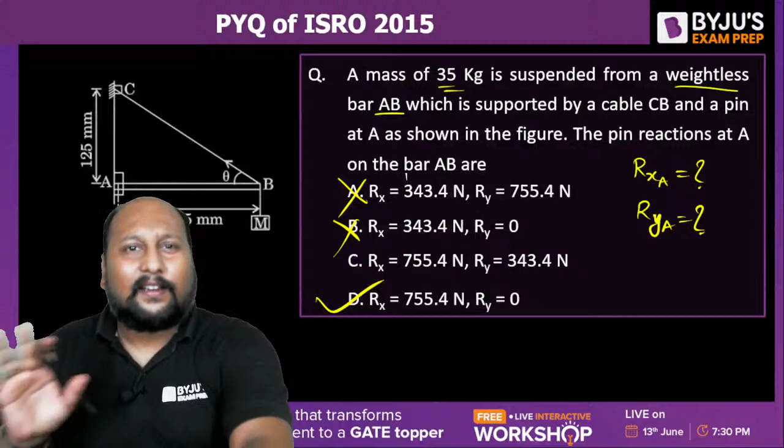Only thing required is slight understanding. So next question, the very favorite topic, that is trusses. A simple structure ABCDE is supported on a hinge A and on rollers at B, while it carries a horizontal force of 1000 kilonewton at point E as shown in the figure. What is the force in the member AC? Quickly tell me, you have to calculate the force in this member.

Which method will you be preferring? Write in the comment section. Which method do you have to proceed with in order to calculate FAC?

Don't tell me method of joint, because if you're going for method of joint, it will be a time-taking approach. What we can do is go for method of section. We can take a section like this, and I can eliminate the lower portion.

Exactly. Or what we can do is we can eliminate the lower portion like this. Okay, so I can simply say this is your complete body.

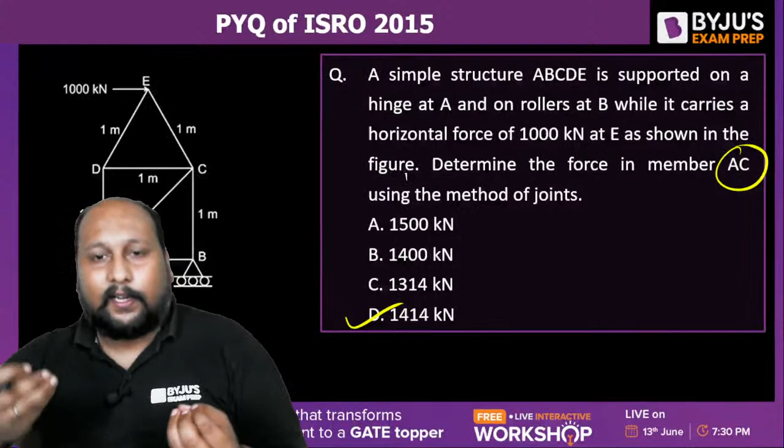Okay, next question on the screen, from heat transfer. Consider a steady state heat conduction across the thickness in a plain composite wall as shown in the figure, exposed to convection conditions on both sides. The inlet convective heat transfer coefficient is 20, outlet is 50, inlet temperature is 20, outlet temperature is -2 degrees Celsius, K1 and K2 value is 20 and 5, the L1 and L2 is 0.3 and 0.15.

You have to tell me what is the interface temperature, let's say this is Tin, if the contact resistance is being neglected. I've given the data, I've written it on the top left corner so you don't have any doubt. So they are asking what will be the temperature at the interface, Tin.

How will you be proceeding? If you attended my yesterday's app class, I've already discussed all these questions. We have already taken this heat transfer previous question. So it's a matter of few minutes, you'll be able to get the answer. Now how will we be proceeding?

This is a series connection. There are 4 resistances, right? We're having 4 resistances. There is a convective resistance over here, there's a conductive resistance over here, again a conductive resistance and a convective resistance, right? This is your Ti, this is your T interface, and this is T outlet.

This is 20 degrees Celsius and 1 upon HO into A. L1 upon K1 into A. This is L2 upon K2 into A, 1 upon HO into A. This is HI, not HO. So we have a series connection, 4 resistances, 2 convection, 2 conductive.

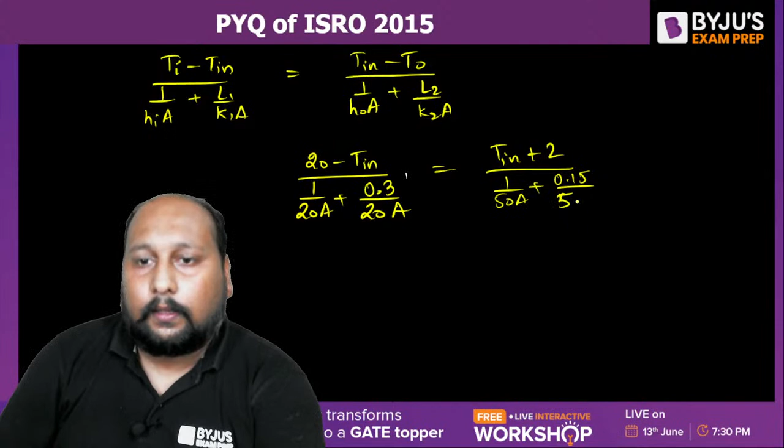0.5 na? L2 is 0.15 by 5 into A, right? So you've written all the values. A will be cancelled out, so we'll be having 20 minus Tin divided by 1.3 divided by 2 is equal to Tin plus 2 divided by 1.15 divided by 5.

Okay, so solve it. 40 minus 2 Tin divided by 1.3 is equal to 5 Tin plus 10 divided by 1.15. You solve it, you will be getting slightly 3.75 degrees Celsius, which is, I think, option C is the correct answer. Okay, C is the correct answer, right?

Slightly calculative. I do accept that this question requires slight calculation, and please make a very clear note. If you are getting slightly calculative, definitely that year you are getting a slightly lesser cutoff. Because without calculator, it's slightly difficult. You have to do some approximation, and if you try to see the options, it's slightly closer - 3.75, 2.75, 4.5.

So you have to have an approximation that should be appropriate. Okay, fine. So you're getting option C as the correct answer, 3.75 degrees Celsius. Done. Can we proceed? Because till now it was slightly calculative. After this inner stretch we'll be having very easy questions from heat transfer, from mechanics, all these questions.

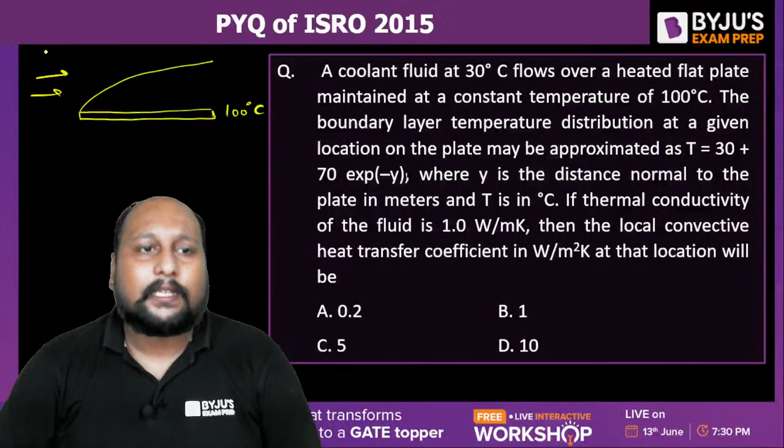They are saying that at a given location on the plate, the temperature profile may be approximated as T is equal to 30 plus 70 e to the power minus y, at a distance y from the surface. Okay, so we'll be having something like this - this will be the temperature profile. So at any distance y, your temperature profile is 30 plus 70 e to the power minus y.

The thermal conductivity of the fluid is 1. What will be the local convective heat transfer coefficient? Can you tell me what is the value of the local convective heat transfer coefficient at a distance x? What will be the value of H?

Simple question. We know that at the boundary, at the surface, when y equal to 0, can we say that whatever heat will be conducted, the same heat will be convected. At the interface, we can say minus K of fluid, del T by del Y at Y equal to 0, is equal to Hx into delta T.

Right? What is del T by del Y? Del T by del Y will be equal to minus 70 e to power minus Y. So we have to put at Y equal to 0, this is equal to minus 70, right?

Fine. So this is minus K, value is how much? 1. Minus 70 is equal to Hx. We need to calculate what is the temperature difference - 100 minus 30 is 70. So here I can say Hx is equal to 1 watt per meter square Kelvin.

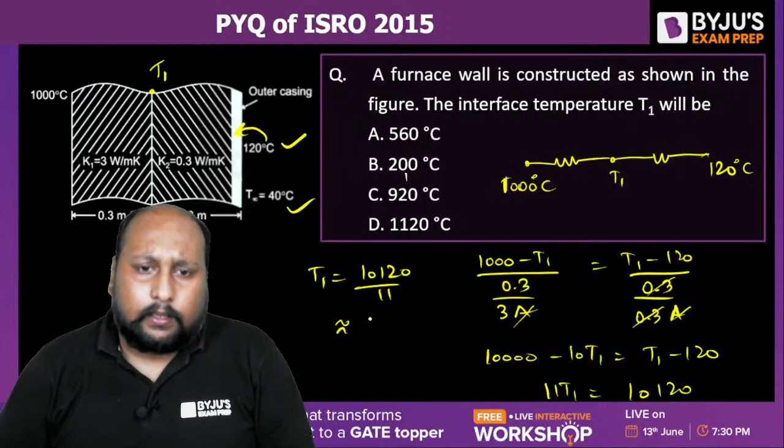Solve it. So this gets cancelled out, A gets cancelled out, this is 0.1. So 10,000 minus 10 T1 is equal to T1 minus 120. So 11 T1 is equal to 10120. So T1 is exactly equal to 10120 divided by 11, so approximately 920 degrees Celsius. Option C, we know, no, it won't be A.

Go with a rough calculation. 10,000 divided by 11, somewhere around 900 will be the value. I'm not calculating the exact value, not required, because the range is very distinct: 560, 200, 920, 1120. There's a distinct range, so definitely option C is the correct answer.

Clear hai? Everyone, please do let me know. Very easy question. Done? Chaliye, next question on the screen from the concept of theory of machines.

Quickly: as shown in the figure, a mass of 100 kg is held between two springs, each having the same stiffness, connected in parallel. You have to tell me what is the natural frequency of vibration in cycles per second.

That means they are talking about hertz. Chaliye, very easy question. Let me draw it over here also, because some students might not be able to see the diagram easily. So this is the diagram that we are having.

Mass M, this is the second spring, 20 kilonewton per meter, and this is 20 kilonewton per meter too. So this is in parallel, so K equivalent will simply be equal to 40 kilonewton per meter.

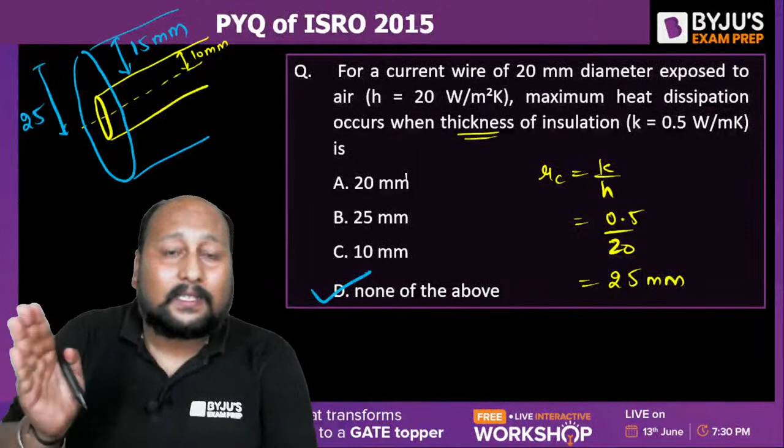This is the mistake students do in this particular segment. The question is very easy, only you need to understand how to get the correct answer. Sometimes in a hurry when they calculate RC and see 25 mm, they mark option B and move forward, which is incorrect. Please read the question carefully. These are some silly mistakes students make in the examination, so this practice will help you overcome these mistakes. Chalo, next question.

Again the same problem, same year, back to back two questions on heat transfer, same topic. It is proposed to coat a 1 mm diameter wire with an enamel paint of 0.1 watt per meter Kelvin to increase the heat transfer with air. The air side heat transfer coefficient is 100 watt per meter square Kelvin. What is the optimum thickness?

Again the same problem, please make sure you are not committing the same mistake. Whenever you have a question from this, draw a small diagram. This is the wire, and always write in terms of radius. They say 1 mm diameter, that is 0.5 mm radius. So Rc will be equal to K by H because this is a wire: 0.1 divided by 100, that is 1 mm. That means for maximum heat transfer, your radius of insulation should be 1 mm. So let us try this: this total should be 1 mm, so definitely the thickness of insulation should be 0.5. Option B is the correct answer. Whatever mistake you can do, that wrong option is there among the choices, so make sure you are careful in the ISRO examination. Option B, 0.5, is the correct answer.

Let us proceed with the next one. In a pulverized fuel fired large power boiler, the heat transfer from burning fuel to the walls of the furnace is by conduction only, by convection only, by conduction and convection, or predominantly by radiation. Simple question. If I say there's a huge large fire power boiler, we know that at high temperatures radiation is dominant over conduction and convection.

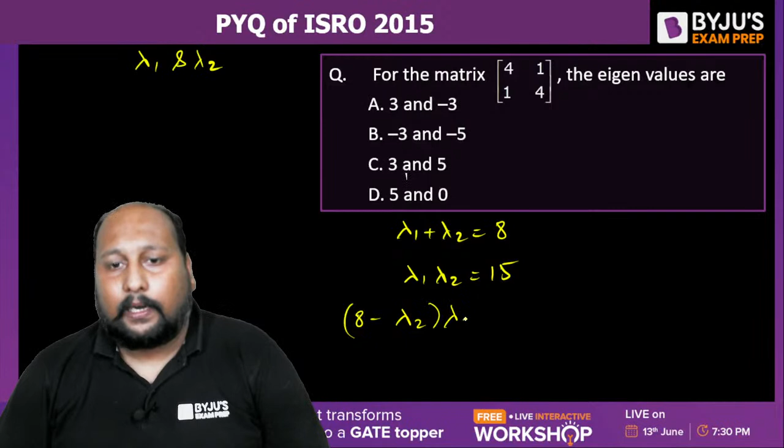For the matrix 4, 1, 1, 4, what are the eigenvalues we are having? Quickly, you have to calculate the eigenvalue. Let us suppose the eigenvalues are lambda 1 and lambda 2. We can say lambda 1 plus lambda 2 is equal to 4 plus 4, that is 8, and lambda 1 into lambda 2 will be the determinant value, that is 16 minus 1, that is 15. So I can say lambda times 8 minus lambda into lambda is equal to 15, which gives 8 lambda minus lambda square equal to 15.

Simple question - you have to make it 8. Only one option is there, that is option C. Definitely no need to solve, but for easiness I'm going for that. Lambda square minus 8 lambda plus 15 equal to 0, so we get lambda minus 5 into lambda minus 3 equal to 0. So lambda is equal to 5, 3, meaning lambda 1 and lambda 2 are 3 and 5. So option C is the correct answer. Clear? Fine, done. Next question.

The solution for the following differential equation with the boundary conditions y at 0 and y at 1 equal to minus 3. They have given the second order differential equation d2y by dx square is equal to 3x minus 2. So what is the equation of y? What function of y are we having? Simple - let's try to integrate one time.

So dy by dx is equal to 3 by 2 x square minus 2x plus c1. Integrating again, y is equal to 3x cube by 2 into this, 3 and 3 will be cancelled out, so this will be x cube by 2 minus x square plus c1x plus c2. So if you try to see x cube by 2, there is only one option - option C is the correct answer. No need to calculate, but let us try to solve it.

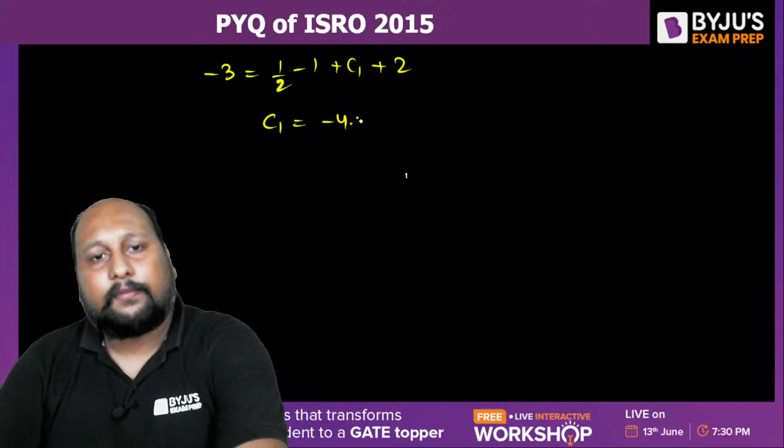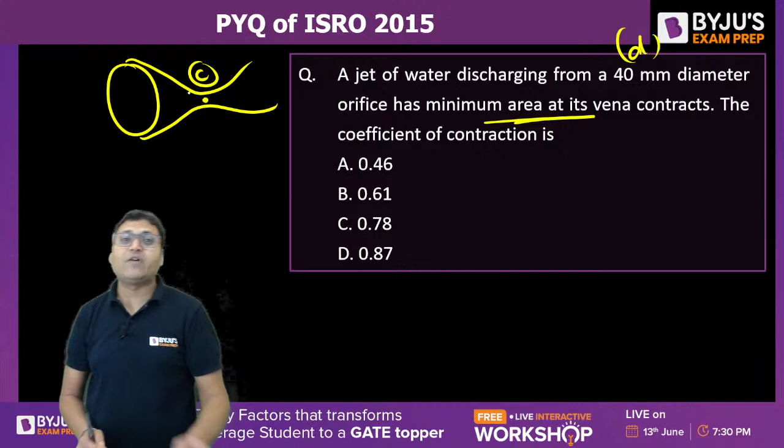In case of pitot tube, we define coefficient of velocity, that is around 0.96 to 0.99. And coefficient of discharge for orifice meter is around 0.61 to 0.69 something. So about the coefficient of contraction, it is 0.61, isn't it? This is a memory based question. ISRO asked this question based on memory as well.

Again, numerical can also be framed from this question, but the question is theoretical, whether you remember the direct formula or not. What is the answer to this one?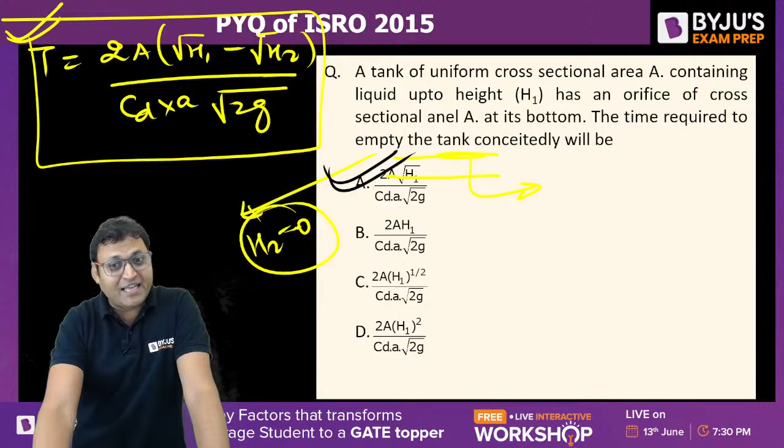This is the standard formula, you can memorize it. Numerical can also be framed. In 2023, I am feeling that there will be a numerical problem based on this formula.

In 2015, mostly standard results were asked from basic standard questions. So you should revise your subjects thoroughly, and whatever important results you are developing, you should memorize them. Nobody is going to ask you to derive those results, and you do not have time to derive them. If you know the standard results, then only you will be able to save some time.

Yes, Abdul, well done. Naruto, good, good, good. What about others? I want everyone to keep responding.

If I solve each and every question here, then you may develop pseudo confidence, and that is very dangerous in a competitive examination like ISRO. So when you will do it on your own, then only you will develop positive confidence, and even if you commit a mistake, you can learn from your own mistakes.

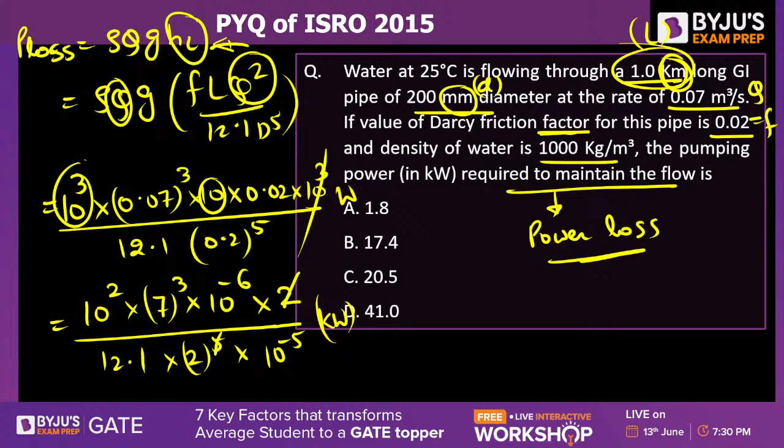Do you understand it or not? Do you get it? What is the answer? So 10 to the power 2 into 10 to the power, this 2 becomes 2 to the power 4, so can we call it 10 to the power minus 4 plus 5? That is 10 into 7 into 7 into 7, which is 343, isn't it?

Divide by 12.1 into 2 to the power 4, that is 16. Can you calculate now? Can you find out the nearest option? Can you find it out? Can you get me the answer?

So it is less than 343 by 16. What is 343 by 16? It is less than 21. Can you find out the answer? It should be around 17.4. Are you guys getting 17.4? B is the answer, B will be the answer.

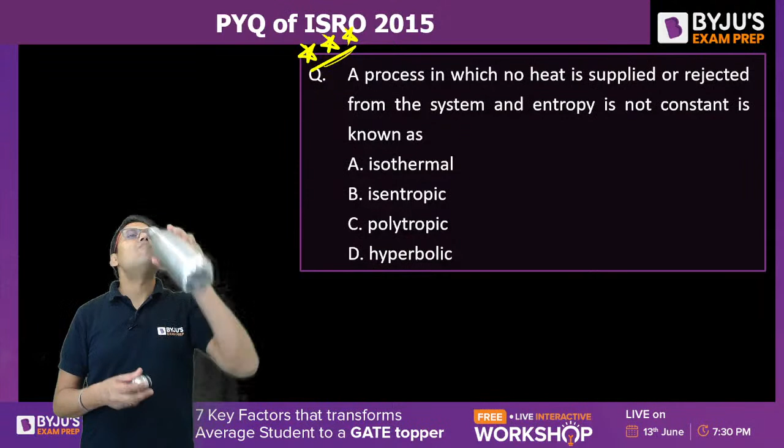We are almost halfway now. A process in which no heat is supplied, Q equals 0, or rejected from the system, and entropy is not constant. Students, because of examination pressure, may not notice this 'not' term and may think it is isentropic. It is not isentropic. When entropy remains constant, then it is called isentropic. Because entropy is not constant here, it is not isentropic. So when entropy changes, temperature definitely changes.

The temperature changes because of work transfer. There is no heat transfer, but temperature can change because of work transfer also. So if temperature changes, it cannot be isothermal. So the process is polytropic. C is the answer, it is a polytropic process, neither isothermal nor isentropic.

Hyperbolic - there is nothing called hyperbolic. That option D is just there to make four options. Otherwise, you must see the difference between isothermal, isentropic and polytropic. So the correct answer is option number C. No, Vinod, D won't be it. Hyperbolic, there is no such process. There is no thermodynamic process called hyperbolic.

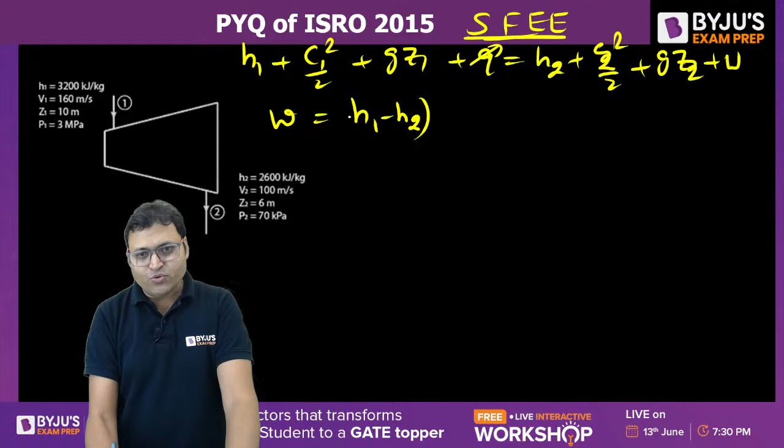Heat transfer is 0, it is thermally insulated - is it thermally insulated? The inlet and outlet conditions for steam for an adiabatic steam turbine mean Q equals 0. So if Q equals 0, the question is to find W. So we can say, in kilojoule per kg, H1 minus H2 plus 1 by 2000 times C1 square minus C2 square plus G into Z1 minus Z2, in kilojoule per kg. Do not forget that it must be in kilojoule per kg, isn't it?

So here also it will be divided by 2000, isn't it? Here also it will be divided by 2000. Do you get it or not? Do you agree or not? GZ will also be divided by 2000. Is it correct or not?

So W is equal to H1 minus H2, 3200 minus 2600, plus 1 by 2000. Then what is C1 square? C1 is the velocity V1, 160 square minus 100 square, plus G is, let us say, 10 by 2000, Z1 minus Z2 in meter, 10 minus 6. Did I write it correctly?

Sorry, yes, it will be divided by 1000. That is what I wanted from you. Yes, we know the others have not responded. It means they are not aware.

So 3200 minus 2600, the unit is kilojoule per kg. So it will be 600 plus 1 upon 2000 into 160 plus 100 into 160 minus 100, isn't it? Then it will be 1 by 100 into 4.

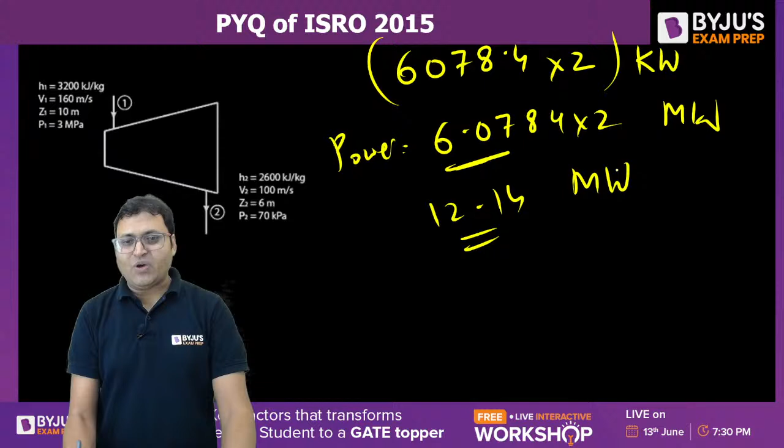So what is 6.07? 12.14 something, isn't it? It is 12.14 megawatt. 12.14, 12.157 is the correct answer. 12.157. Are you getting it or not? Option A will be the right answer. I hope this is clear. I am solving this without using the calculator.

The next question on your screen. How many of you got the right answer? Nobody? Nobody told me option A? Nobody had given me the answer as option A. Why? That art you should learn.

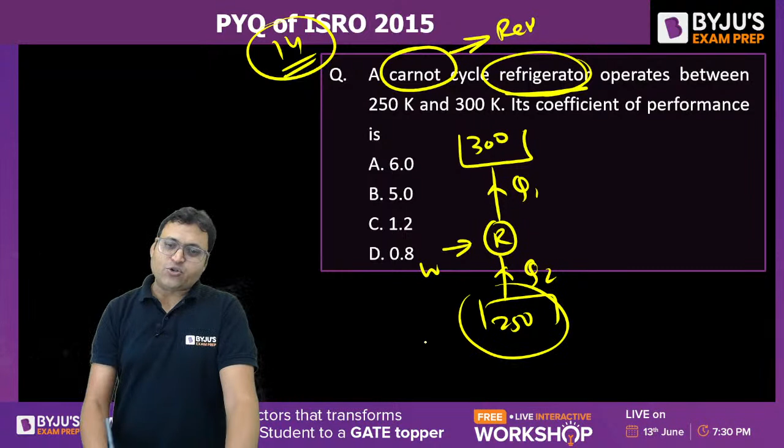A Carnot cycle - here it is a Carnot cycle, meaning reversible. A Carnot cycle refrigerator operates between 250 Kelvin and 300 Kelvin. So it is 300, that is the refrigerator. It is a refrigerator, not a heat engine. So Q1, and then this is Q2, W, and this is 250, the cold storage space is at 250 Kelvin. This is at 300, T1 is 300, T2 is this. What is the coefficient of performance?

COP is equal to Q2, the desired output, upon work input. Or we can say Q2 upon Q1 minus Q2. And if it is a reversible refrigerator, then it will be in terms of temperatures, so T2 upon T1 minus T2. What is the value? T2 is 250 upon 300 minus 250, that is 50. 250 upon 50, that is 5 will be the answer. B is the answer. Yes, B.

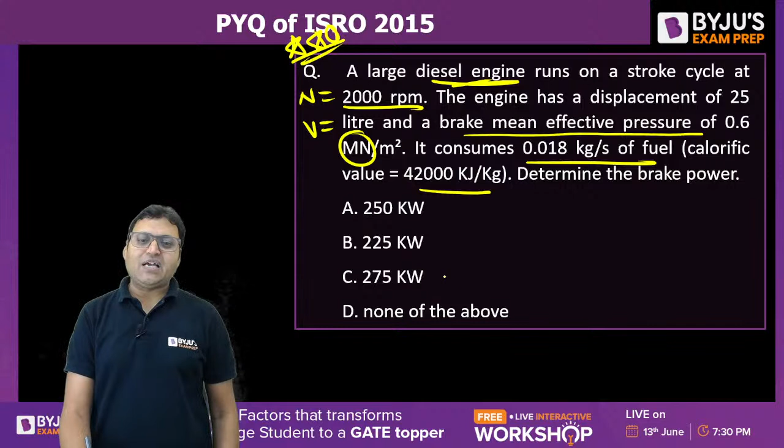Next is a beautiful question from a diesel cycle engine. A large diesel engine runs on a four-stroke cycle at 2000 rpm. The engine has a displacement volume of 25 liters, that is A into L, and the brake mean effective pressure is 0.6 mega Newton per meter square. It consumes a certain amount of fuel with a calorific value of 42,000 kilojoule per kg. We need to determine the brake power.

Brake power is torque into omega, or torque into 2 pi N by 60. But in terms of mean effective pressure, we can say brake power equals brake mean effective pressure multiplied by A L N by 60, similar to how we write indicated power using mean effective pressure into A L N by 60.

Here there is a catch. For a two-stroke engine, whether petrol or diesel—petrol engines can be two-stroke or four-stroke—for a two-stroke engine, N RPM equals N cycles per minute. But for a four-stroke engine, like this diesel engine, N RPM implies N by 2 cycles per minute. So because it is a four-stroke diesel engine, we will multiply by N by 2 also.

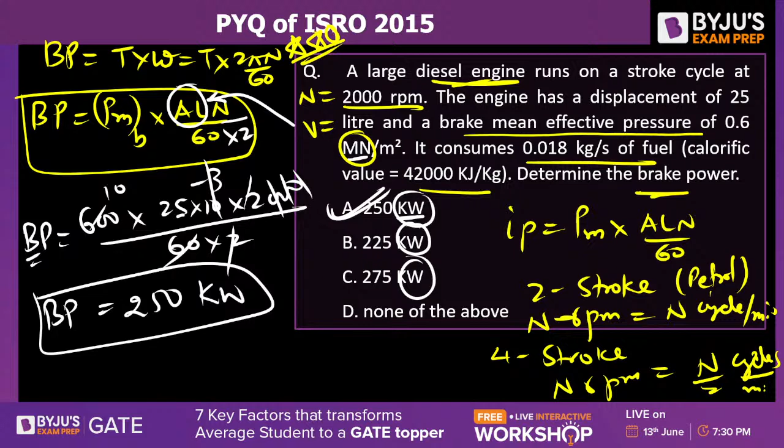The next two questions are theoretical, and then I will complete the ISRO 2015 previous year question paper successfully. The next question.

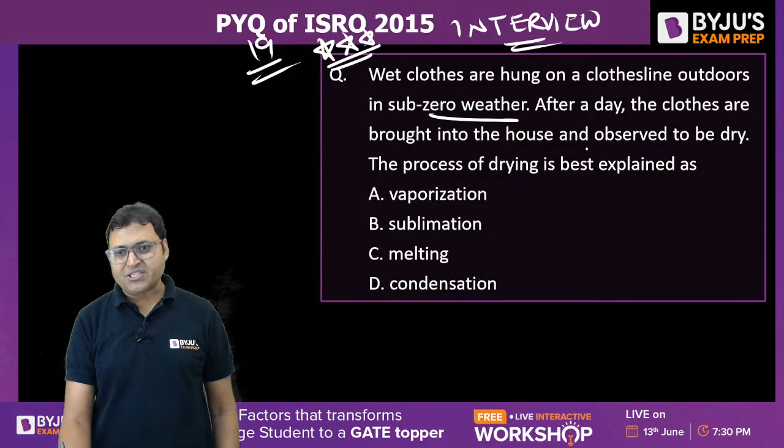Wet clothes are hung on a clothes line outdoors in sub-zero, low temperature weather. After a day, the clothes are brought into the house, which is warm, and observed to be dry. The process of drying is best explained as:

When the clothes are taken into the room, the water in the clothes will freeze, and due to the difference in the room temperature and the cloth, the freezing water will directly become vapor.

The conversion of ice into vapor is called sublimation. Solid into vapor is called sublimation. So why does it appear to be dry? Because all the ice on the cloth converts into vapor directly, skipping the water stage. This is conversion of solid ice into vapor directly, called sublimation. The process is sublimation.